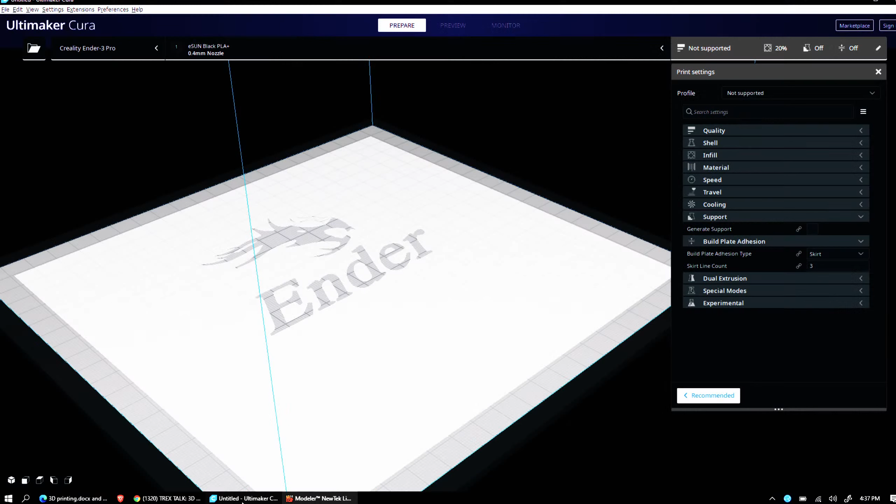It's perfectly fine because what they are seeing is what I am seeing that they are seeing. Here are some 3D files that we're going to be working on today, and here are some 3D programs that we actually use to 3D print files on the 3D printers. As soon as the camera comes back up, we're going to talk about how the 3D printers work.

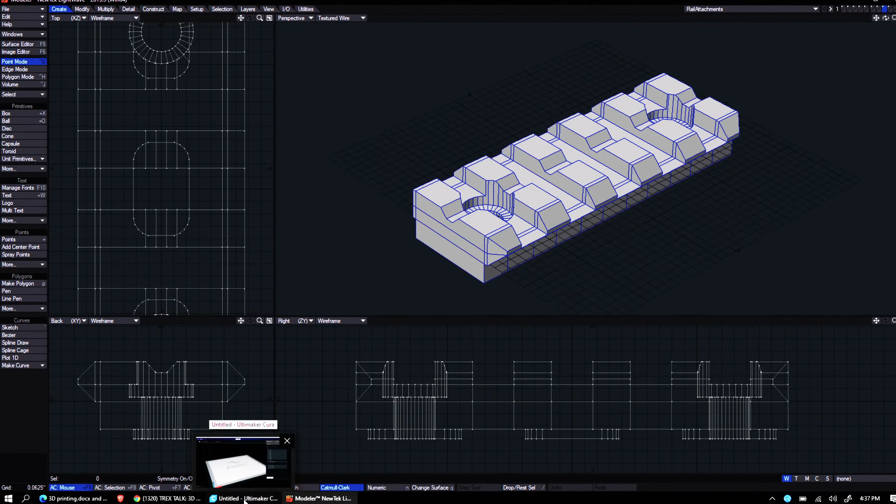The media has really focused on ghost guns as this extra terrifying thing because Americans are not afraid enough of regular guns. So one of the things we're talking about as we discuss this isn't just mere gun control, but information control.

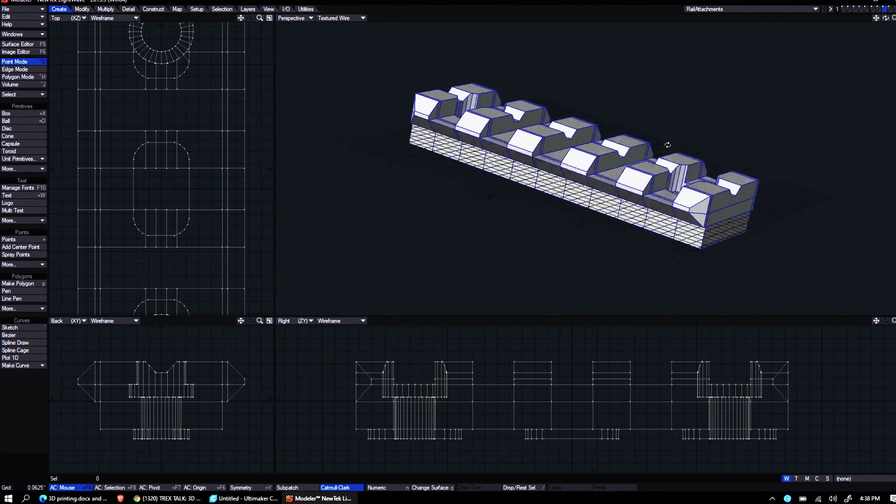When the media or the Democrats or any of us talk about restricting the flow of information so that a 3D file like this - this right here is a 3D file, it's a little piece of Picatinny rail, a rail adapter that goes from this type of adapting mechanism to this type of adapting mechanism, that's all that this is - it's not a firearm part as far as function goes, but this is the kind of thing that theoretically could be banned because it is firearm related.

But all that it is, is points and polygons, or it could be a 2D blueprint written on a piece of paper. At what level are you able to control this information?

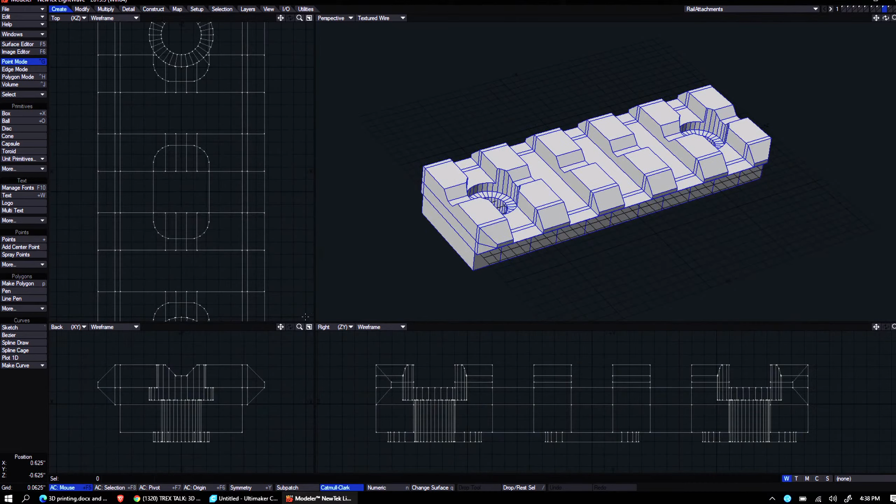So there's a philosophical aspect to this argument as well as the legal aspect to the argument. And then, of course, there's the practical side as well.

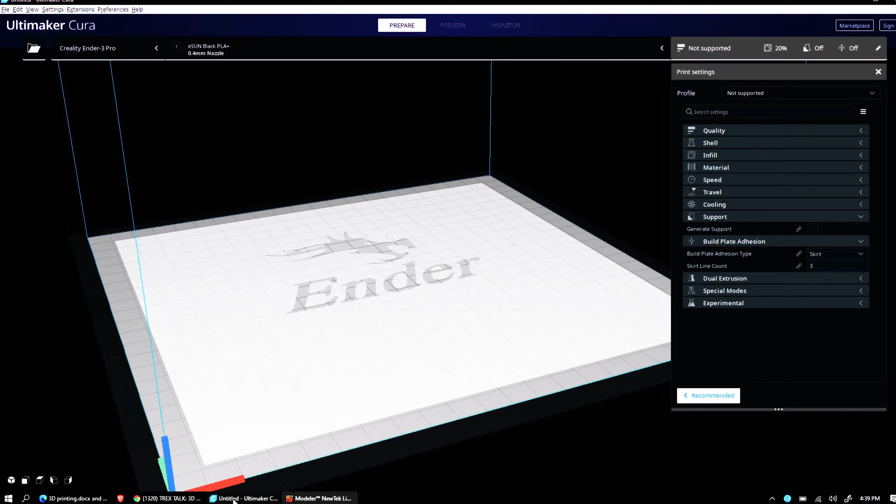The fact of the matter is, as I mentioned before, even though there's been some significant crackdown on the sharing of 3D files such as this, if you know how to find them on the internet, you have always been able to find them. They have always been there, and it has not inconvenienced anybody to have them not be on the front page of Google.

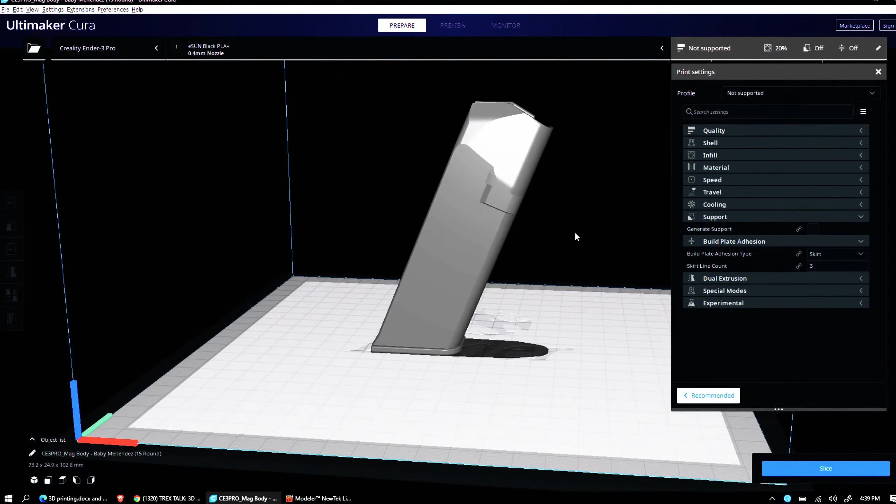Let me hop over here to another file that is kind of handy. This is a file that you might recognize what it is - I'm not going to say what it is. It's just a piece of plastic when we print it out, and that's all it is. But people have been able to find and print this part regardless of what the State Department or the Commerce Department has been saying, and that's been a very interesting thing.

The way that the internet works is you can't stop the signal.

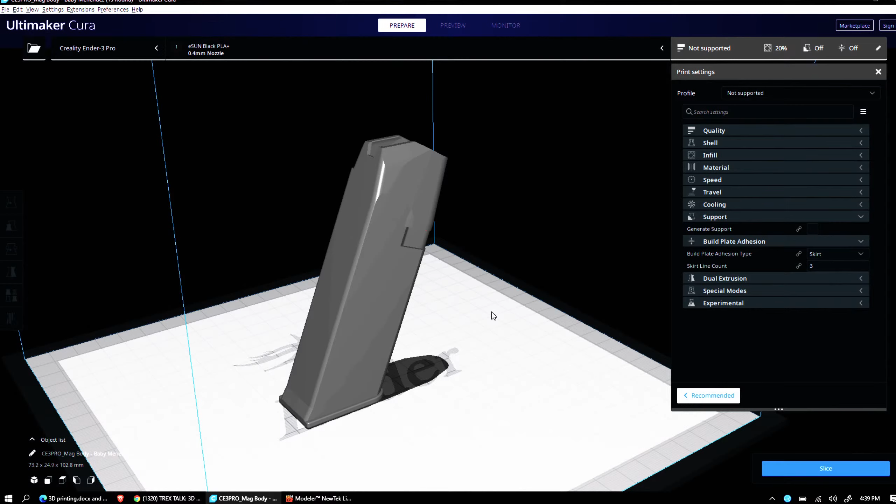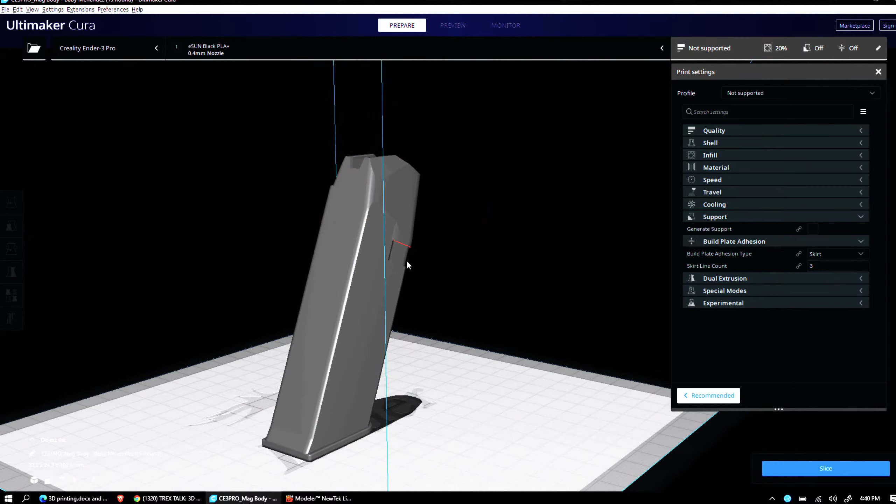Now, from the technical side of things, you all know roughly how 3D printers work. As soon as I get my camera back up, I'll be able to show you exactly what the 3D printer looks like and all the different parts. But this is the software that feeds the 3D printer the instructions that it needs.

So right here, you build yourself your file in a design package of your choice, but ideally you should not use the one that I have chosen. You should use Fusion 360. We'll talk a little bit more about that later.

So what you're going to do is you're going to take the 3D file that you have created, or the blueprints. Actually, you know what, I have to talk about this.

So from a legal standpoint, the fact that the government cannot decide exactly how it wants to talk about blueprints, files, machine language, stuff like that is very interesting, because essentially what is happening here is a bunch of arbitrary nonsense. A 3D file, like the one that was just on the screen, is too easy to print or mill on a CNC machine, so that kind of thing is not allowed to be shared. But 2D blueprints, that's still okay, and the only reason that it's still okay is that's harder to do.

But the fact is, if that is the tack that the Commerce Department, the State Department, the legislature, or the Supreme Court takes, that's very problematic, because basically you're saying the best way to communicate engineering data has to be limited for certain types of engineering data just to make it harder, and for no other reason.

It's like hieroglyphics. It's like saying, oh, you can use English, a very commonly understood language capable of communicating technical data in great detail, to talk about everything, but not when you talk about guns. When you talk about guns, you have to write cuneiform tablets out of clay. You have to pass gun information from an engineering standpoint in the oldest way possible, not using 3D files or machine code that's actually useful. You have to do all the converting yourself just to create an arbitrary speed bump for people that want to do anything with gun stuff.

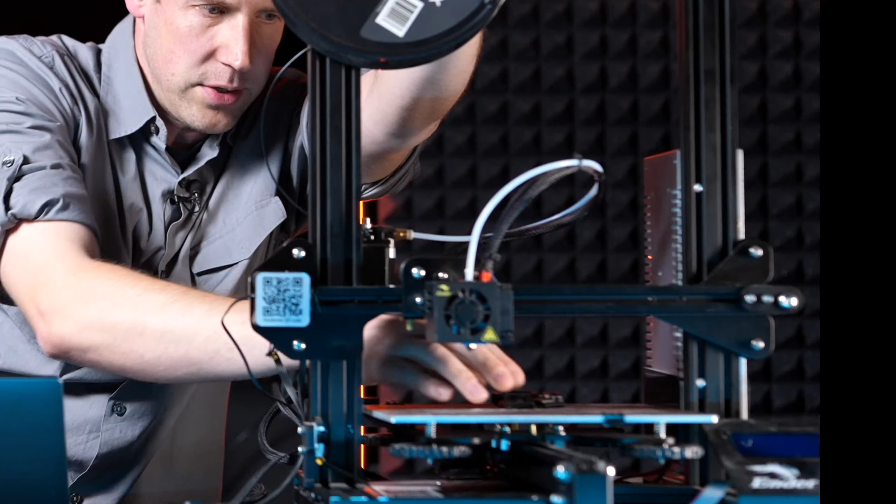I'll talk about these in a couple different ways because they do different things. The way the Ender 3 works, I apologize if you already know how 3D printers work, but I'm going to blitz through this. Over here we have a hot end that heats up the filament into not quite a liquid, and it takes the filament off of a spool that usually hangs up here, pulls that down through the bottom, and then begins to print layers of molten plastic onto the bed, one layer at a time, and then the next layer, and the next layer. Gradually it builds up an object that has thickness and substance to it. The bigger the object, the longer it takes, but you can make a three-dimensional object.

Let's see if we can get the focus to work. I feel like a different YouTuber. I feel like AVE right now, explaining how this 3D printer works and telling the camera to focus.

So this right here is that Picatinny rail section that was on my computer earlier, and it now is in 3 dimensions. It's real, actual plastic. I can do stuff with it, and I can print out other stuff on here. Some of you may have seen these little keys here were printed out to adapt the TLR7 weapon light so that it can go onto the Glock 48 MOS. Having the ability to print plastic objects simply and easily is a tremendous value for T.REX because we use it for prototyping, but it has a lot of other values too.

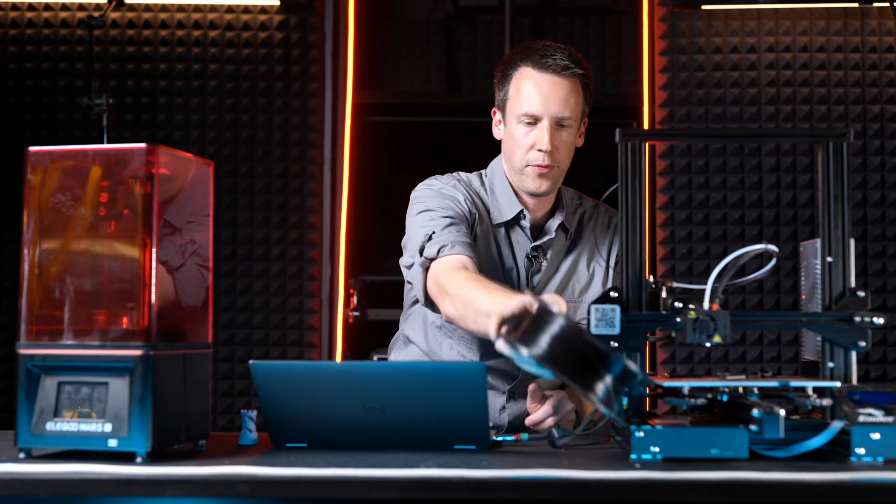People are saying the filament is on backwards. Yes, sorry about that. I actually left the filament roll - we took it off of here and it's attached to the shelf where this normally lives, and I couldn't be bothered to bring it. Just kind of imagine it doing its thing.

There's a bunch of different filaments you can use. This is ABS, which is hard to print with. You actually want to have an enclosure for that because it wants to warp as it cools. If you allow the molten plastic to go down onto this heated bed and then cool in an inconsistent way, then you will probably get shrinkage and warping that's not great.

I actually feel even more like AVE now. Gentlemen, down here, the hot end gets heated by the electricity and comes oozing out in a metaphor that cannot be used on this particular family show. Keep your stick on the ice.

So what we tend to make with these things are prototypes for T.REX. Some of my best prototypes I cannot show you because they're for products that are not yet out. But this is kind of an interesting one, and you can take this idea and steal it and run with it because I haven't had time to work on it much. This is a hand stop.

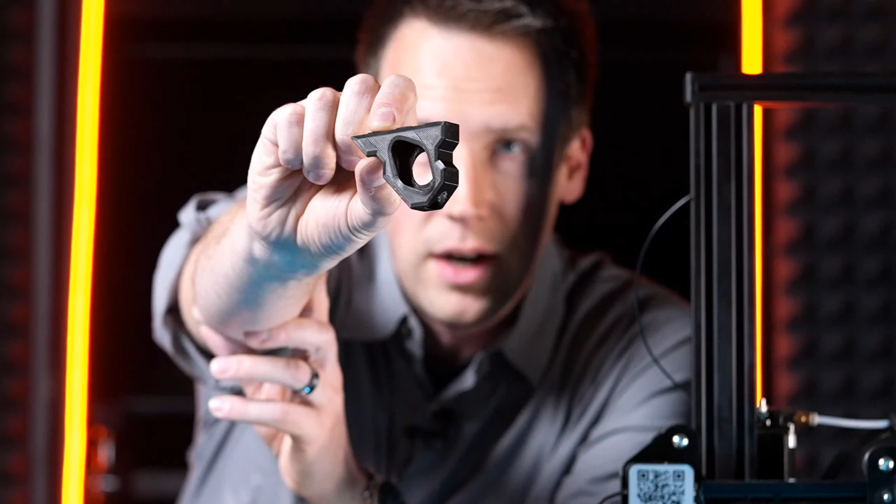Focus, you camera. This is a hand stop for probably some kind of semi-legal rifle - you could put it on a legal rifle, of course. One cool thing about it is it's got a little tiny cutout in here, and you can take one of these little keychainy flashlights and pop it inside there. So now on your hand stop, you have a little tiny task light that you can use for stuff, like making sure you don't step on Legos, which is the main thing that I want in a weapon-mounted task light. When I'm doing CQB, there's always Legos on the floor - that's just how it always plays out.

So yeah, it's a 3D printed part that has a cutout that accepts the little thingy. And then there's a ton of different flashlights that you can get. You can even get the IR spectrum flashlights and use this with night vision.

So, really simple shape - interesting to just print it out, test it, see if it works, see if it needs to be a different shape. This is probably a little snug on that flashlight, but on the other hand, you don't really want it popping out, so maybe that's good. The ability to do rapid prototyping, where you print something out and immediately test it, immediately get feedback, and immediately print out version 2 and start testing that, is fantastic. When we were doing a certain project, we were doing a couple of revisions a day on a particular part, and that's pretty phenomenal stuff.

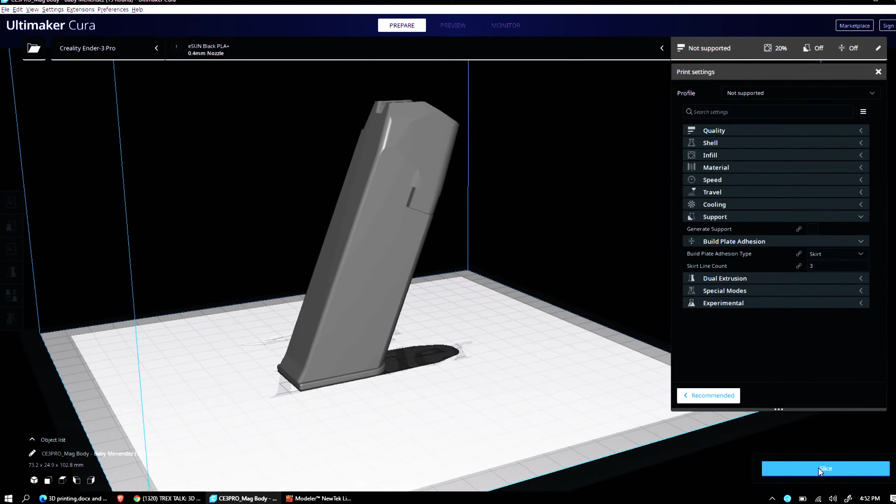And then you need a piece of software called Cura, which is open source. If you want to switch over to the computer feed there, Charles - here is our random 3D object that we want to create in plastic.

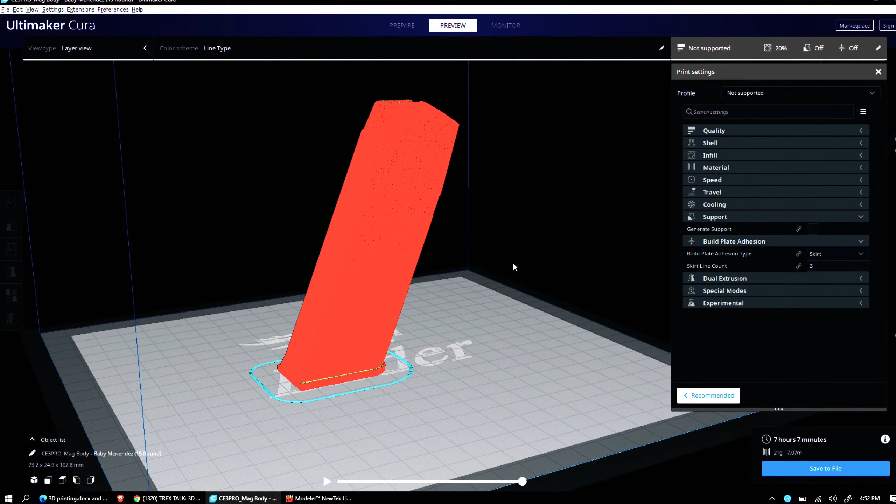We're going to slice it into the different slices that you might want to see. It takes a little while because I think I have a few too many settings turned on. Now, this is actually potentially a kind of tricky thing to print. Let's check the preview here. One reason this might be tricky to print is if we print it at an angle like this, we should really have something holding it up on this side, maybe, probably.

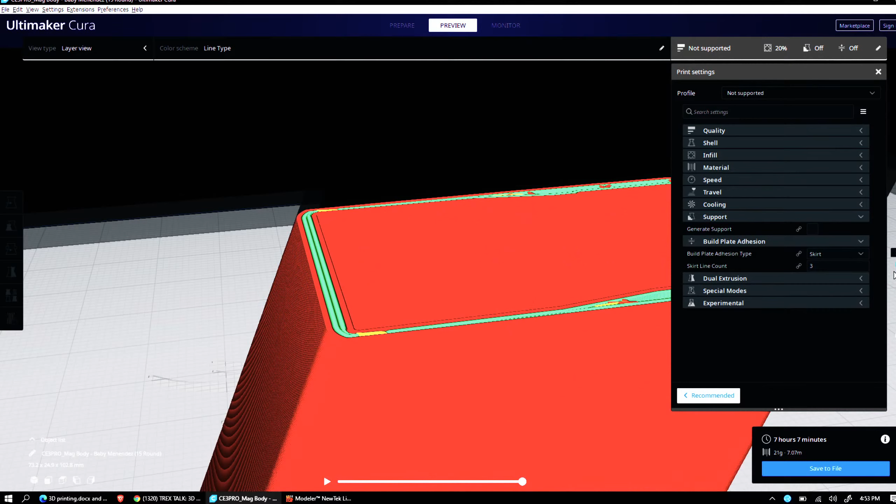You can turn that on - you can turn on supports and reslice it, re-export it. But what you see here, if we zoom in, is the layers that are going to get printed in order to build this object up from the bottom to the top. There's a ton of different settings, most of which are automatically selected because in preparation I made sure I had my actual 3D printer selected and all the settings that it likes.

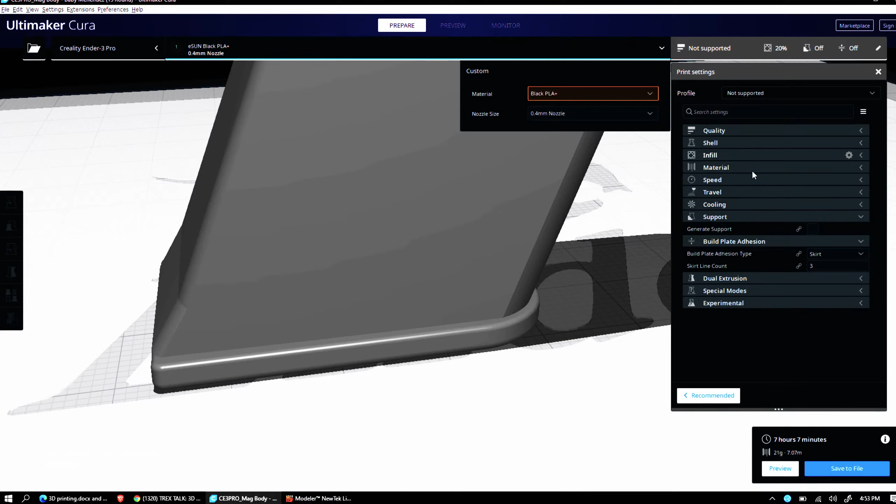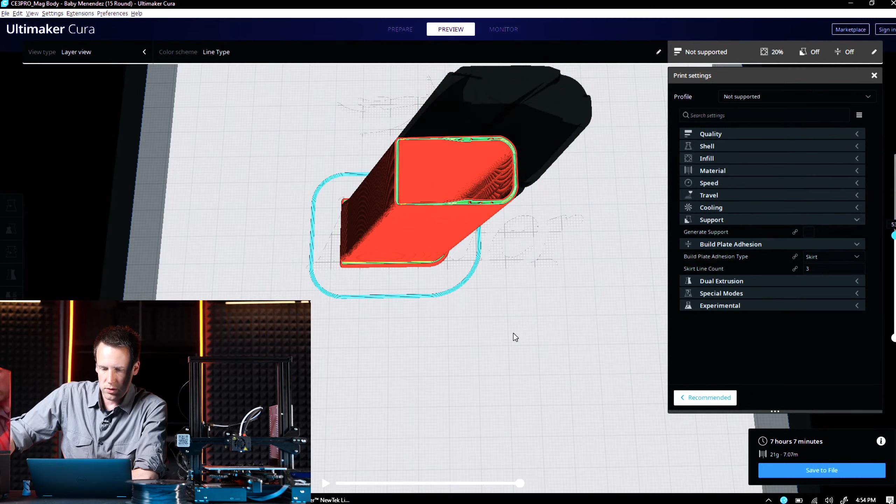And then I selected the black PLA Plus that I bought from eSun. So I should get all of the settings over here basically correct, and then I'm going to tinker with these settings until I get something that prints properly - even though at first it'll probably take you a while to figure out some of the things. You might want to print easier stuff than these functional things that are a little bit trickier. So there's a whole bunch of things to learn here, and a bunch of ways to get started.

I would recommend that you look into Control Pew, which is a group of folks - I mean, it's probably one guy, but it's also a group of folks that are creating materials, and there's a great starting guide over there.

So yeah, that is the filament printer. Very easy to get into. The parts are relatively strong. They're never going to be as strong as a machine injected part, but there are actually some ways around that depending on how much work you want to do. You can actually get a considerable amount of extra strength out of a part like this.

The biggest issue you're going to run into, as you print these flat layers one on top of the other, is that they're not going to adhere to each other quite as well as you'd like. They're going to stick together, but it's not going to be the same as a completely monolithic piece of plastic where everything is fully melted together.

But one of the things you can do is, after you've printed something like this and you have the shape the way that you want it, and the sizes the way that you want them, and you have your focus perfectly dialed in there - which is easier said than done - you're able to take this shape and put it inside of a plaster of Paris mold, just by putting plaster of Paris around it. Or, there's a guy on YouTube that has been doing a pretty good job of just packing the part directly into powdered salt, I guess.

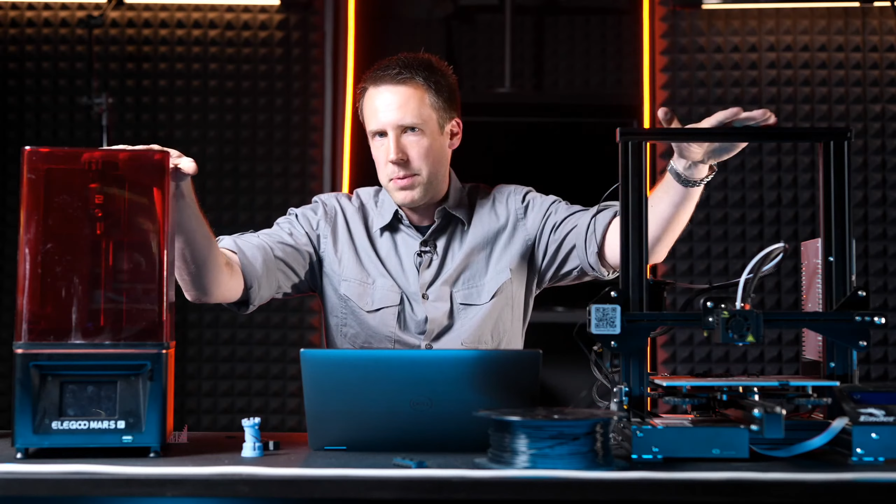Going back to print annealing, you can heat up the oven. You could just throw this into the oven, but it would just melt into a puddle. So what you really need to do is support this shape with a mold or some sort of medium, like powdered salt, where you can really pack it together so it won't dimensionally change shape while it melts. If you can do that, you can anneal it and it stays in this exact shape. It all melts into a contiguous piece, and then you chip away the mold and you have just plastic left. Now this piece has some complicated internal cutouts for mounting the different M-LOK hardware, so you'd probably have a tough time chipping all of that plaster of Paris out if you went with that mold.